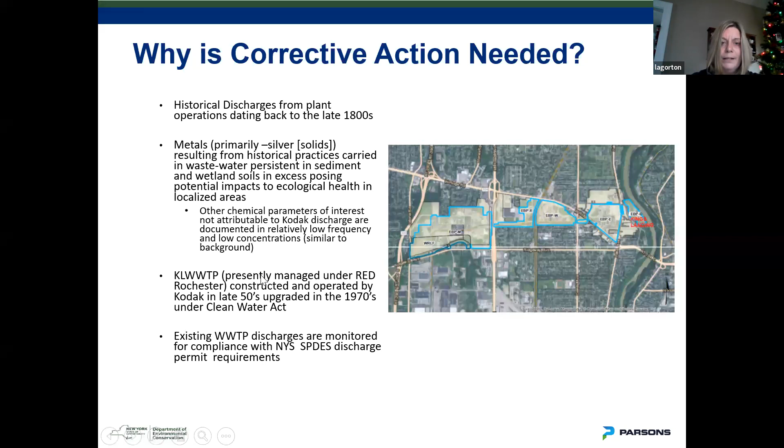During this process, we worked extensively with stakeholders, our primary stakeholders. We were under a memorandum of agreement with EPA, also working with our counterparts at DOH, with natural resource trustees, which members of the DEC and US Fish and Wildlife are members of. We're consulting on an iterative process through this time frame at key decision-making points to move the process forward.

Parsons did facilitate that process for us, and it all culminated in issuance of our prime dredging contract in early 2021, April timeframe. The selected contractor, White Lake Dock and Dredge out of Michigan, was selected to perform the work. They were the contractors on the water performing the work. They've done an excellent job for us.

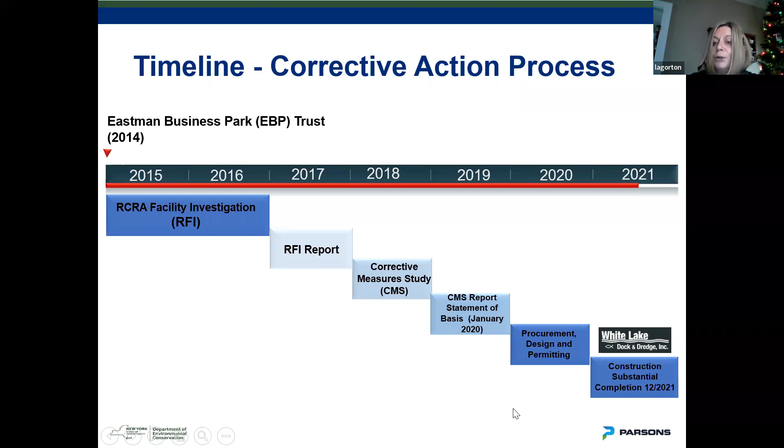And I'm happy to report that we did reach construction substantial completion here earlier in December. I'll note that Amy is going to go through some of the permitting stakeholders that were involved in the process, because that was a key integral part of getting us into the water, the permitting piece.

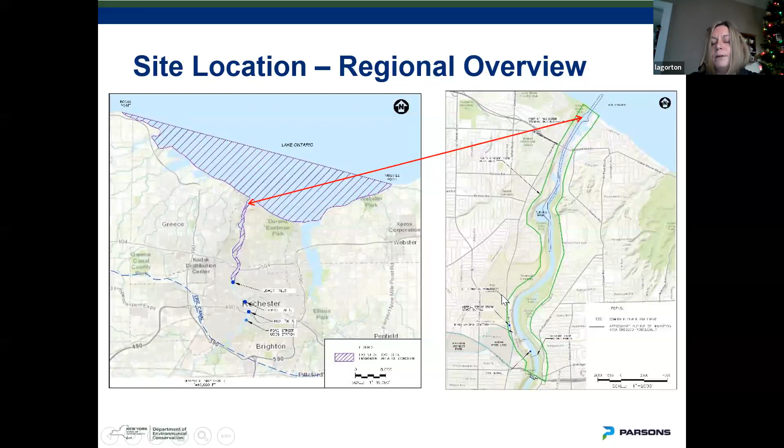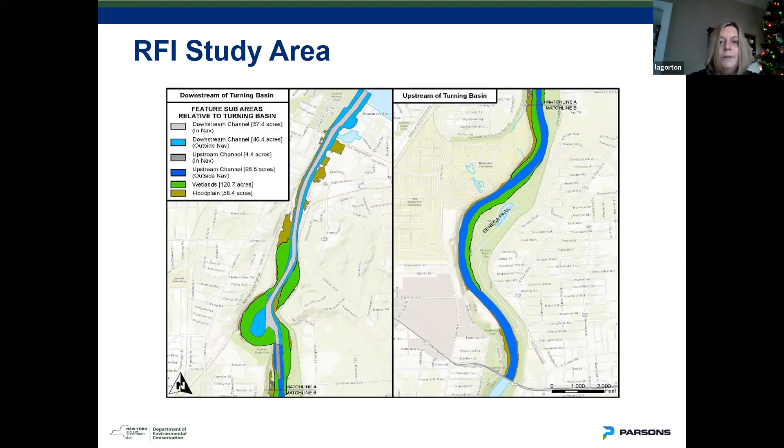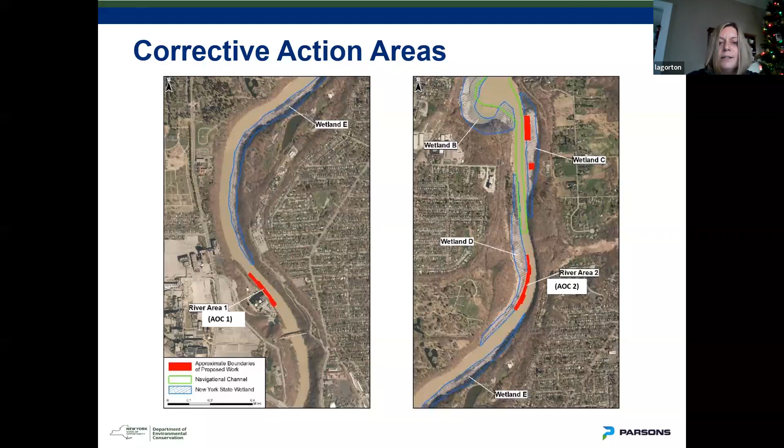And I'm going to advance into the next slide. These areas are the corrective action areas that were selected for remediation. Many have asked me along the way, how do you get from point A to point B and select these areas? Well, multiple lines of evidence and data were evaluated and applied through the process.

So the focus areas, we found silver to be the primary contaminant of concern. There were areas that might be subject to erosive forces under flooding or high flow conditions that may release those impacted sediments back into the environment. We also focused on the availability to the ecological receptors in the area. This is an example of some of the studies that were conducted, and this is just a snapshot, not all inclusive, but many, many studies went into this, and all the studies resulted in data that were used to develop multiple lines of evidence.

And the data really led us to these red areas where we felt we could add the best value, balancing criteria to address any future impacts, and again focusing these studies in the wetlands as well.

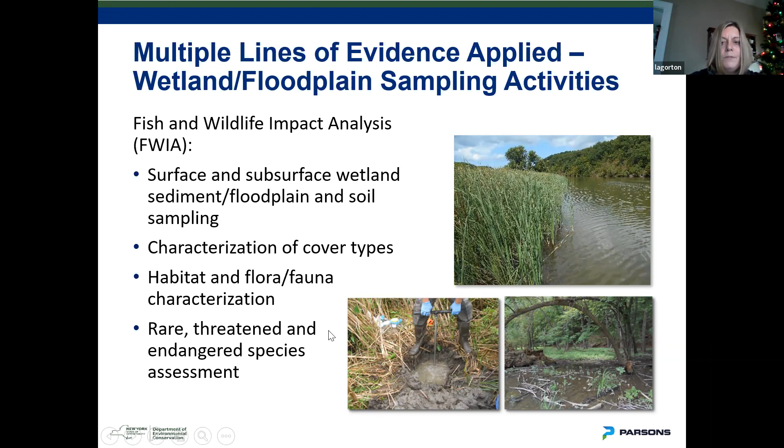Back into the environment resulting from contaminants of concern. Silver was selected as a primary contaminant of concern for both river and wetland sediment and soils, and it was focused on some primary scour zones—areas that might be subject to erosion and release of contaminant under high flow conditions.

Back to remedy selection, we worked closely with DOH and studied impacts to the silver. Silver was not identified as a contaminant of concern related to human health, under a passive recreation use standard. Resulting in that, our selection of the remedy really focused on ecological exposure.

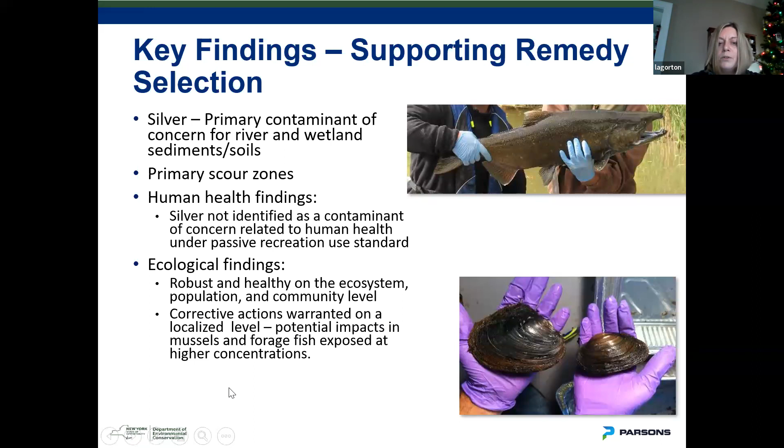As we transitioned into that phase of the project, we really saw that generally the river system is very robust and healthy. You can see by the pictures on the right, the fish and mussel community is robust. But the data also led us to support that some corrective actions were warranted on a localized level, where there were potential impacts to mussel and forage fish at particular locations that may have been exposed to higher concentrations of silver.

With that being said, these are the corrective action objectives that were developed for the program. I won't go through all of these bullet by bullet.

This led us to the considerations for development of the selected remedy, which overall was to reduce and stabilize areas with the potential for transport of silver-containing sediments. We evaluated action levels, sediment guidance values were screened, and we developed many river and wetland alternatives in the corrective measures study. They were developed separately and reviewed before the remedy was selected as part of the corrective measures action process.

The selected corrective action and construction elements implemented this past summer included dredging—20,000 cubic yards of riverbed removal, 8,000 cubic yards of wetland removal—and also some isolated capping in river channel areas and backfill in wetland areas. All the backfill placed met an ecological use standard, a Part 375 ecological use standard for those familiar with the regulations.

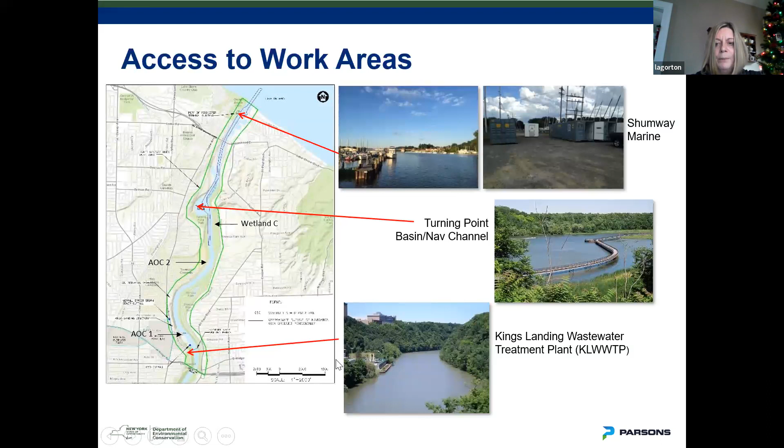Perfect, got it. As Lisa pointed out on the previous slide, there's 28,000 cubic yards of dredging. In addition to that, to restore the areas, there was about 28,000 cubic yards of capping and backfill material, an equal quantity. So a total of about 56,000 yards of material to move into and out of the river.

So the question became, where are we going to be able to do that? The river is flat at the mouth by Lake Ontario at the north end, but most of that area is marinas and parks, very limited open space to move that kind of material through there.

We had conducted most of the investigations on the river through the Shumway Marine up at the north end of the river, but that was small boats—typically pontoon boats. As you go south on the river, going upstream, the river becomes less and less accessible due to wetlands, and a gorge starts to become very deep, very incised. There's the walkway at Turning Point Basin, and then it gets very steep, very limited access, no roads down to that point.

There was one point at King's Landing. It's adjacent to one of the work areas, AOC 1, River Area 1, adjacent to King's Landing off of Maplewood Drive, that we decided to use.

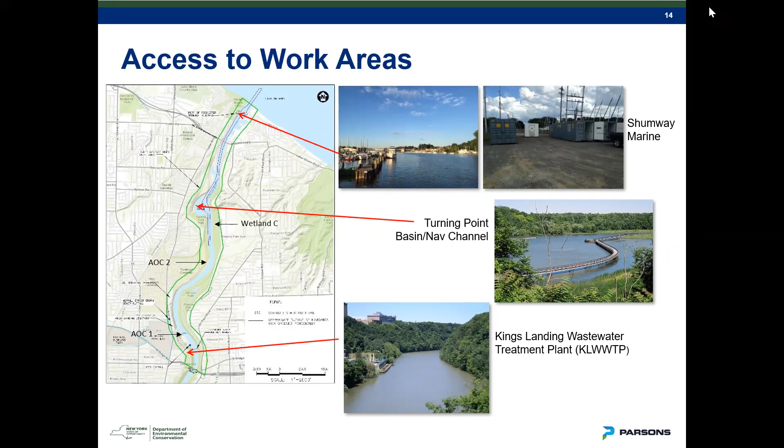We selected the staging area on the lower right corner of the figure. You can see where it's located, right by King's Landing, also adjacent to one of the river areas. But there are 3 work areas: river area 1, river area 2, and wetland C, and they're pretty good distance apart.

It's 1.5 miles from the staging area at King's Landing to river area 2, plus an additional half mile, so a full 2 miles distance between them.

The work areas are defined by different colors: green, orange, and purple. Wetland C on the left, which is purple, has 2 separate areas, one of which is disconnected from the river, not adjacent to it. So we had to go across the wetland to get to that area to do the work.

The work elements involved moving all the material back and forth on the river in barges, both the dredge and the cap material, taken to the staging area where it would be offloaded or loaded, processed, and eventually disposed of. Any water from the dredging, which could potentially be contaminated, would be treated and discharged to the King's Landing treatment plant, which was advantageous because we didn't have to haul it any distance—we could simply pump it to the adjacent treatment plant.

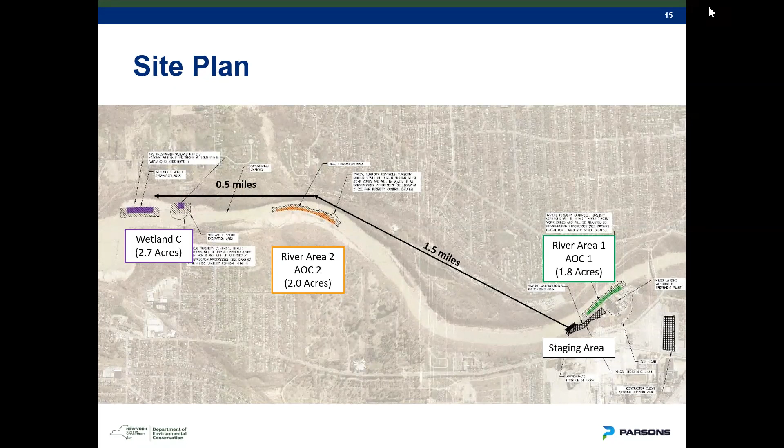So what did we have to build at King's Landing? It's off Maplewood Drive, in the gorge, dropping about 150 to 200 feet down a steep access road. We found there was about 2 acres usable—a long, skinny area, but fairly close to river level, only about 15 feet above the water elevation, so pretty good access. We didn't have to cut a lot of trees or do a lot of grading to make that happen.

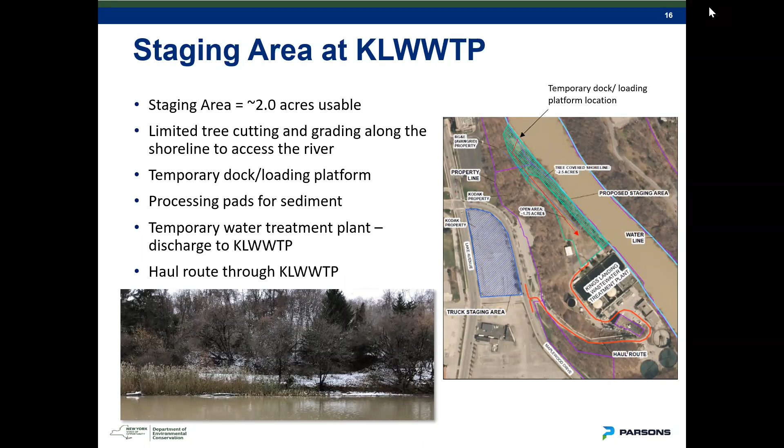We had to build a temporary dock and loading platform at the water's edge—you can see that at the top right corner of the picture. We also built processing pads for the sediment, since it would be too wet to truck off site, plus a temporary water treatment plant on site to handle whatever water came off the sediment, and a haul road to the plants. The red line shows the route from the dock down into the plant, then a windy road up to the top. It was a small area, but we anticipated it would be big enough to do the work.

These are actual photos of the area during construction, and we were pretty fortunate—a lot of these photos are actually drone photos. The contractor had a drone, which gave us some very advantageous shots.

The first photo, top left, is a temporary dock built out of sheet pile with stone and wooden mats to fill it in. The river bottom there is fairly steep, giving us quick access to deeper water for the barges. The photo in the lower left corner is the actual dock, just about completed—that's where the barges were loaded and offloaded.

Anything offloaded was taken into a truck and hauled up the haul road, the skinny line between the trees, to the processing pad.

The top right corner is the sediment processing pad. It's got 2 sections that would hold about 800 cubic yards each. It was lined with HDPE, a polyethylene liner, and some cement so it would retain any water that came off the sediment, so we could treat it and send it to the treatment plant.

The bottom right picture is the actual completed processing pad, that long skinny item. The blue area is the water treatment tanks, and there was a treatment pad built for the water treatment plant as well, which would also contain any water in case of leakage.

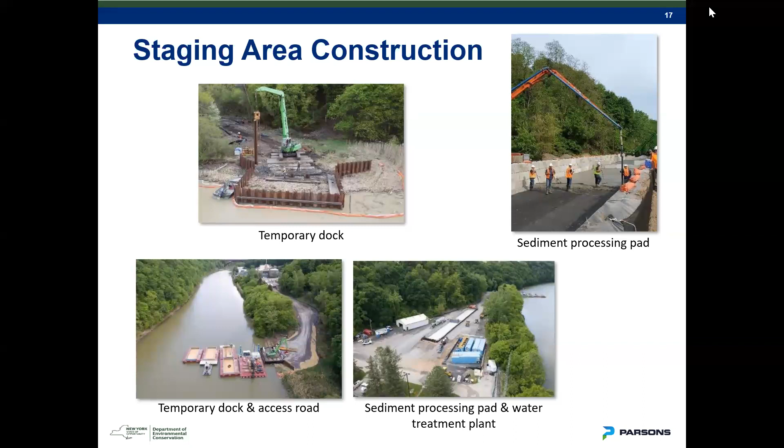All right, the dredging. We had 2 areas of in-water dredging. We anticipated 28 inches, and we allowed for 6 inches of over dredging, mainly because it's very hard to control underwater dredging to exact tolerances. And it was about 20,000 yards there.

Wetland C was 26 inches. We allowed for 6 inches of over dredging. That's because the surface of the wetland is very soft and it would not support heavy equipment very well. And in Wetland C, we actually had to excavate into some of the areas, particularly the area that was not at the river's edge.

I'll show in a couple of slides the Lake Ontario elevations and how that actually affected the work. And also in that area, to be able to dredge in, we were able to translate into some wetland enhancements.

for variable topography. We had some restrictions on when we could do the work due to fish spawning in both the fall and the spring. In the wetlands, we were allowed to work from June 1st to October 31st, about 5 months. In the river, from July 1st to October 31st, 4 months. But that's a little bit difficult because most of the material, about 70%, was coming out of the river with a 1 month shorter duration.

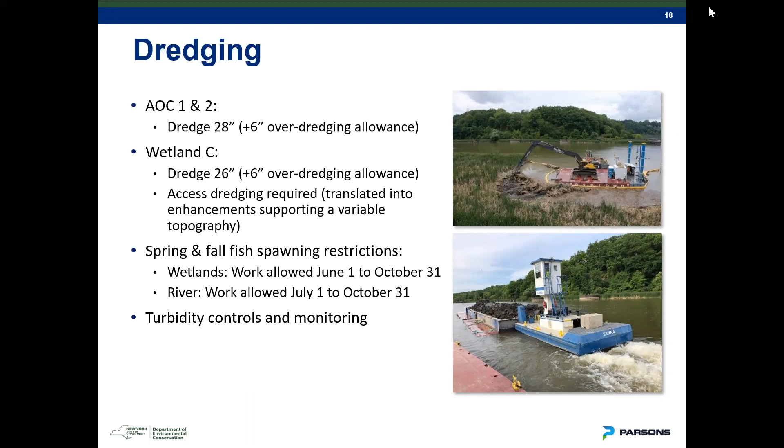Fortunately, we were able to have no restrictions on the dock construction, so we got that ready ahead of time. And we'd have to have turbidity controls and monitoring so we did not affect the river quality.

These are some shots of the actual dredging. You can see it's a barge mounted excavator. It had about a 70-foot reach, and it would only require about 22 inches of water to be able to work. The barges or scows where the materials were put into would carry about 80 yards each. They would draft about 10 inches empty, but about 5 foot when full. So you can see the importance of having water depth in order to do the work.

Those barges would be tied off to the excavator barge and then loaded up as they were taken care of. Most of the work areas were adjacent to shore. You can see there's some pretty neat excavation right along the edges of the wetland. And you can see, particularly in the bottom right corner, the turbidity controls, the silt curtains that went around the work area. That would be moved up with the equipment as it moved.

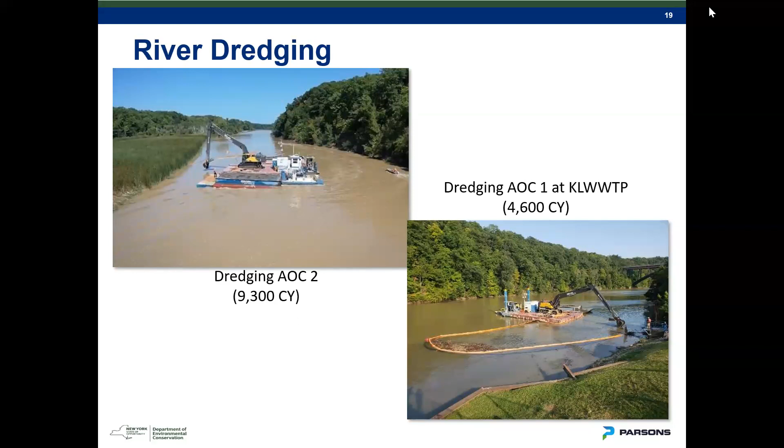We measured turbidity both upstream and downstream to make sure there were no increases in turbidity of the river. But you can see in the top left corner, the color of the river. It's pretty chocolate, so the turbidity is pretty dark. It's just normally from the flows in the river.

Lake Ontario water elevations. This became important. Lake Ontario is obviously controlled by Massena up at the St. Lawrence River, to some extent, but Mother Nature controls most of it though. And there's little difference between the actual lake and the river work areas that we were in.

In 2017 and 2019, there was some flooding. You can see the peak flows up around elevation 249 or so. Typically the summer peak is about 247 foot. Wetland C lies at about 246. This year, the actual elevation during the work was 245.4, so quite a bit lower.

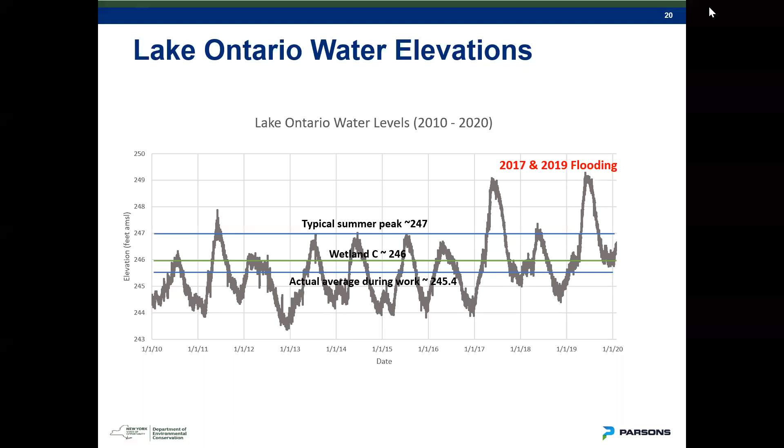The barges wouldn't be able to float into Wetland C because of that elevation. So that's why we had to dredge some additional areas into it. And I would note that the river areas were not affected by any of the water depth.

The NRD trustees had requested that topography for the wetland enhancements, and then they requested that we leave those slots deeper, so the final elevation would be less. This gave us different water depths and different types of vegetation growing in there. I'll show more on that in a later slide.

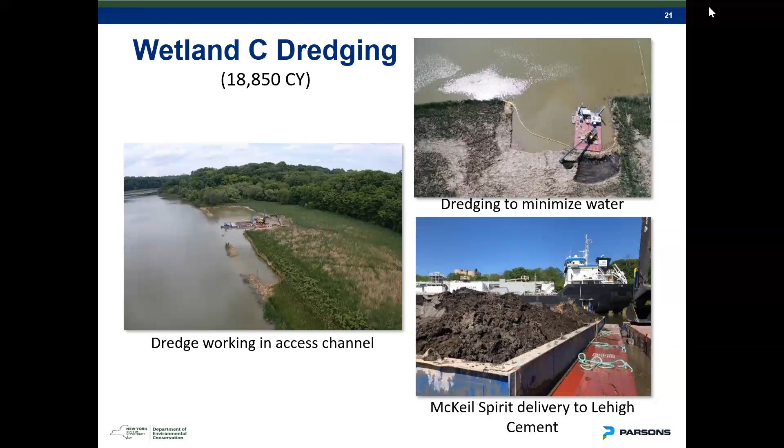And once they were able to no longer reach any further, they would take that dam out, let it flood, and then move ahead. Interestingly, in the bottom right corner, you can see how close we were working to the McKeil Spirit that delivers cement to Lehigh. That's about a 459-foot boat that comes in there and backs out. So pretty tight quarters.

Once the sediment was excavated and loaded into barges, it had to be dewatered and solidified with Portland cement, since obviously it was too wet to be able to truck off site. The material was taken to Seneca Meadows in Waterloo as non-hazardous, and then the water was treated and taken to King's Landing under an agreement with Kodak.

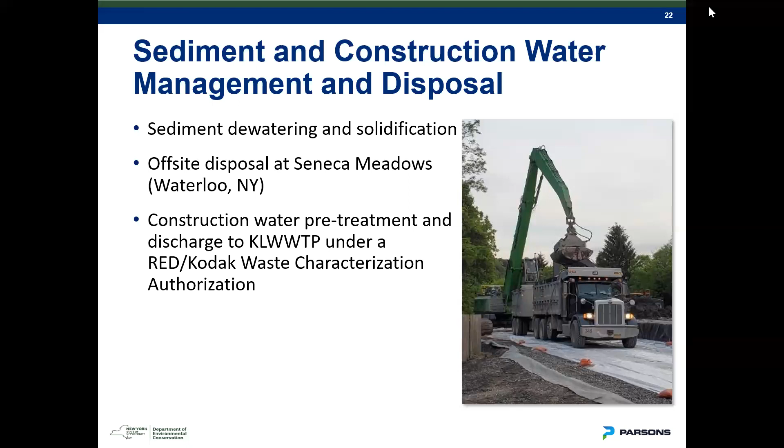This is a picture of a truck being loaded. You can see there's plastic underneath the wheels. The contractor used that to contain spills and keep the road and tires clean. If there was any spillage, they would clean that up and replace the plastic as needed to keep things clean.

We used 2,550 tons of cement, about 6% by weight. 46,000 tons, 1,300 truckloads that had to run through the site, and discharged 272,000 gallons of water to the treatment plant.

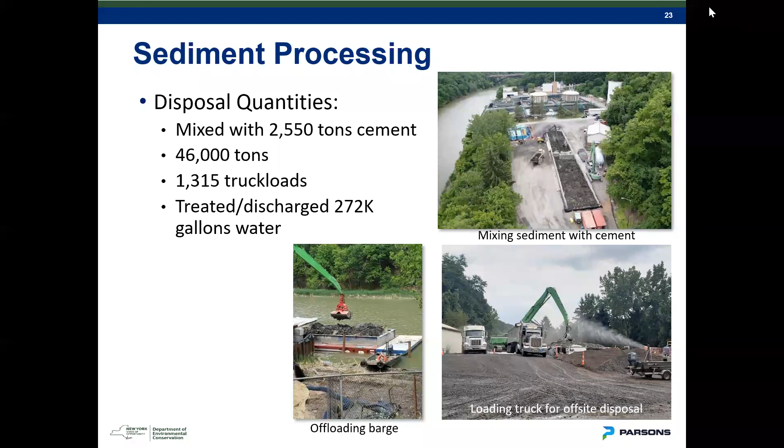Once we were done, those areas had to be capped or backfilled and restored - AOC 1 and 2, the river areas. We had some capping in front of King's Landing, a multi-layer cap made of sand and stone. Wetland C had sand and topsoil in the areas that were not going to be an access channel, that would return to the original excavation depth. Backfill was sand in just the channels, and then restored with a variety of wetland seeds and plants.

The backfill material was obtained from relatively local quarries - Sodus, Webster, and Phelps. And then we had to restore the staging area once all of this was done back to the pre-existing conditions. During the capping and backfilling process, we also had those spring and fall fish spawning restrictions as we did with dredging, and the same turbidity controls.

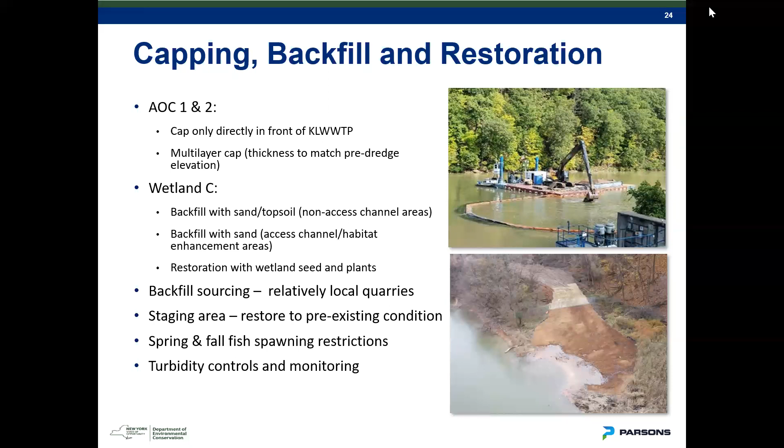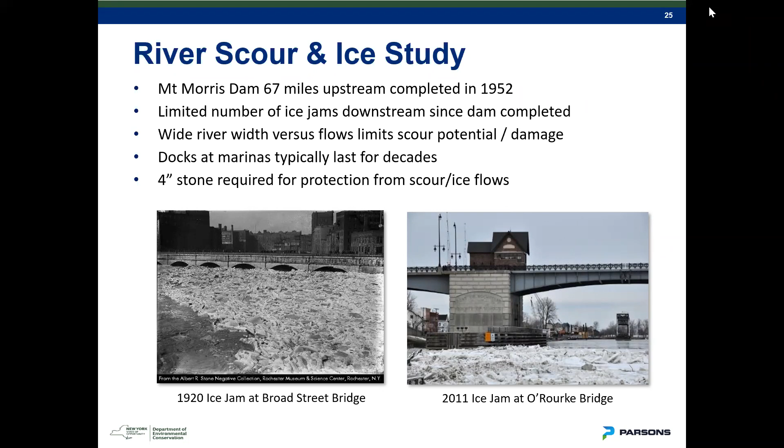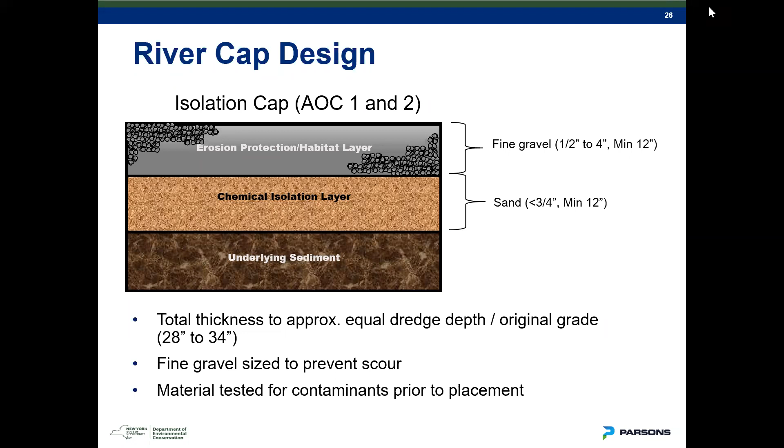This is a quick schematic of what the in-river cap design actually looked like. We had 2 layers: a chemical isolation layer on bottom, made of sand, 3/4 inch or smaller, 12 inches thick minimum, and then an erosion protection habitat layer, which is the 4-inch stone to prevent scour on top of it. It was approximately the same thickness as the dredging, 28 inches, plus that 6 inches of over-dredge, so somewhere in the range of 28 to 34 inches. All those materials that were put in there were tested for contaminants against the ecological standards, as Lisa mentioned earlier.

Wetland C was similar, 2 layers, sand and topsoil, again 12 inches thick for each layer, sand on the bottom, topsoil on top. Topsoil was only required in the areas that were going to be above grade, returned to the original elevation, and the areas that were the channels were just sand. Again, the thicknesses were comparable, we tested the material for contaminants, and based on the Lake Ontario elevations, the low water level is required for dredging into that area in order to do the work.

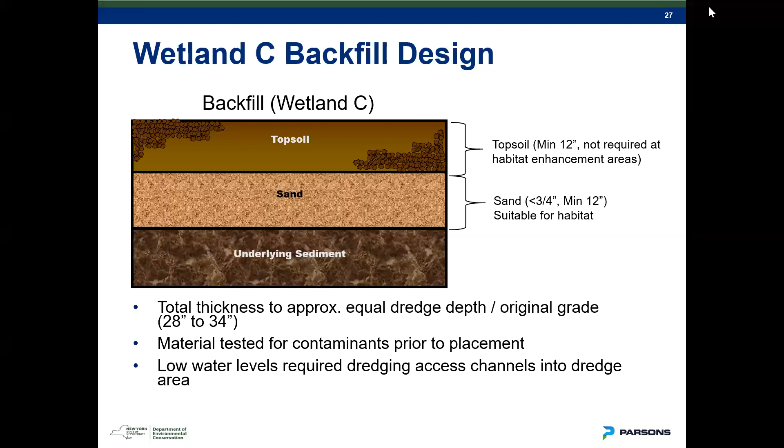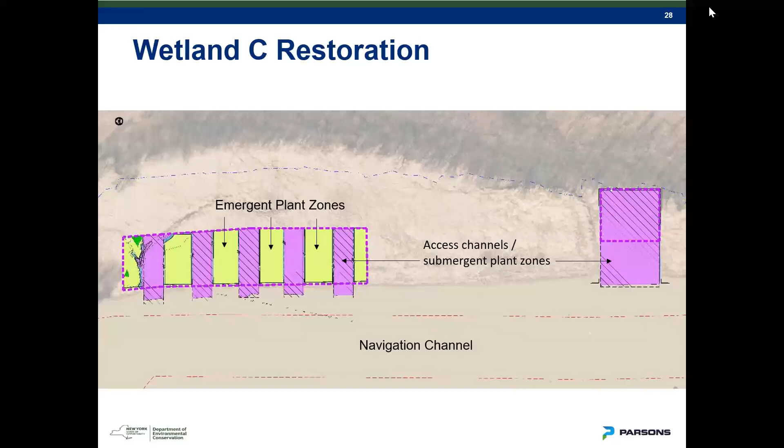Backfill and capping is basically the opposite of dredging, minus the processing, materials, offsite disposal and water treatment. So basically we just had to deliver and load the material into barges and then go place it in the river.

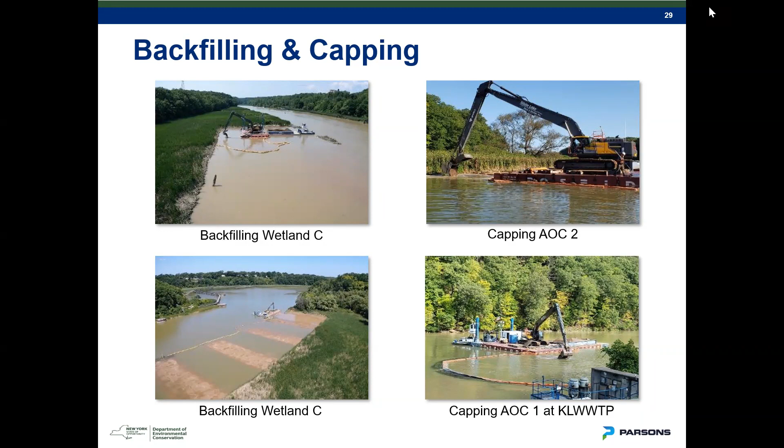Left-hand side shows backfilling occurring in Wetland C. The first slide top left is where it's starting, bottom left is close to completion. You can see the various elevations, so we have some different topography. Area AOC 2, top right corner, is immediately adjacent to a wetland, and bottom right is right in front of King's Landing, with a real good view from shore on that one.

So working blind, how do you control all this work if it's underwater and you can't see what you're doing? Well, the dredge operator has a dredge program. It's a GPS that gives him both vertical and horizontal control.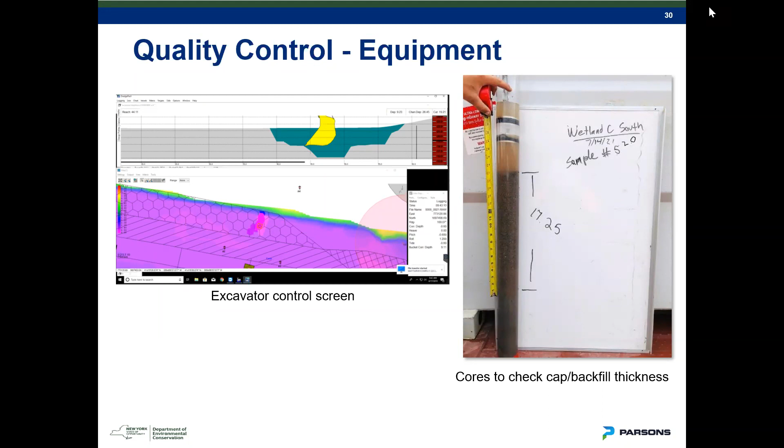We could check the sand layer with Lexan tubes, in addition to any checks we have from survey. You can see them measuring, and the difference in materials is about 17 inches at that particular location in Wetland C.

Quality control for surveying: we had 3 types of surveying methods being used. There was the survey boat using sonar, also an echo boat for shallow water, which was a remote control boat basically working with a joystick that would record readings. Once you get into real shallow water where neither boat can access, the guys actually did pole shots. It's kind of a humorous picture on the right - the guys came up with a pretty inventive footwear method, with paint trays strapped to his feet so he wouldn't sink into the material.

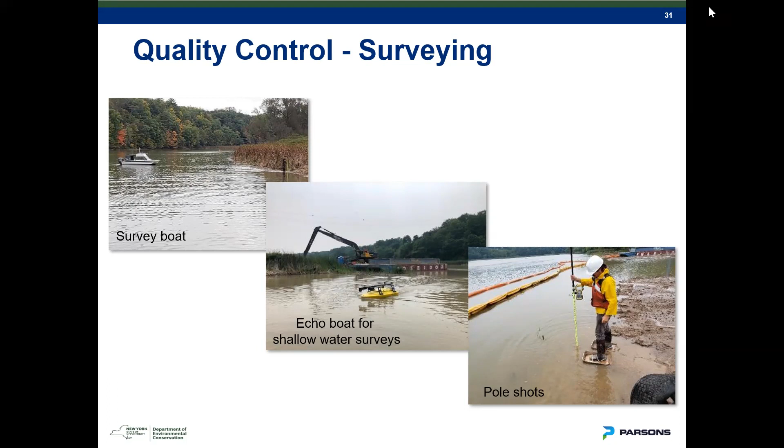Quality control for turbidity: the work areas were surrounded by silt curtains, a floating curtain with a weight on the bottom so the top stays at the surface and the bottom goes deep into the water column to surround and contain the area. You can see on the top right we're working inside the curtain in all areas - that's a picture during capping.

We had monitoring buoys to measure turbidity, located 100 foot upstream and downstream. They used telemetry to send messages back to the work trailer, and we could compare the upstream to downstream readings to make sure there were no exceedances. Fortunately, through the work, we did not have any exceedances.

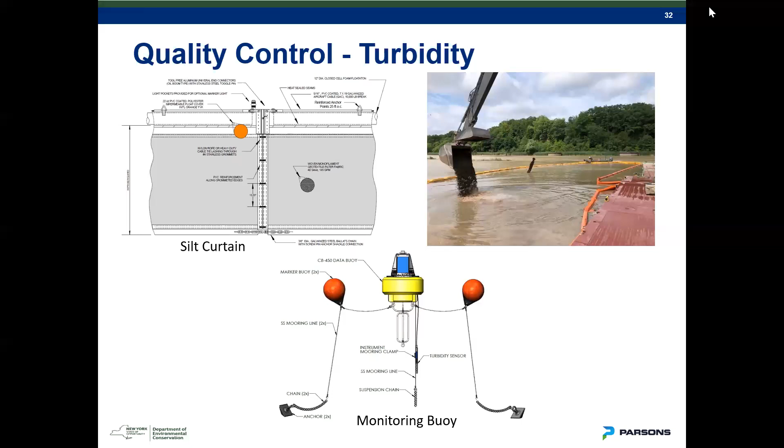Wetland C plantings: we had both emergent and submergent plants. Emergent plants grow above elevation, and submergent ones below. You can see on the bottom right photo the differences in the submergent and emergent zones - those are in the process of revegetating.

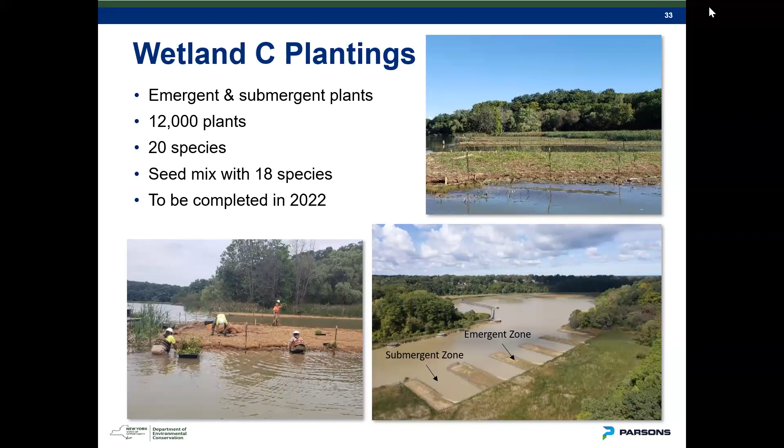We actually are planting about 12,000 plants made up of 20 species, additionally using a seed mix with about 18 different wetland species. The work will be completed in 2022. Unfortunately, some of the seed mixes and plants were not available in 2021 - surprisingly, a pretty big demand for it. But you can see we got a pretty good start on it in the areas, and it'll only get better next year when the growing season comes along.

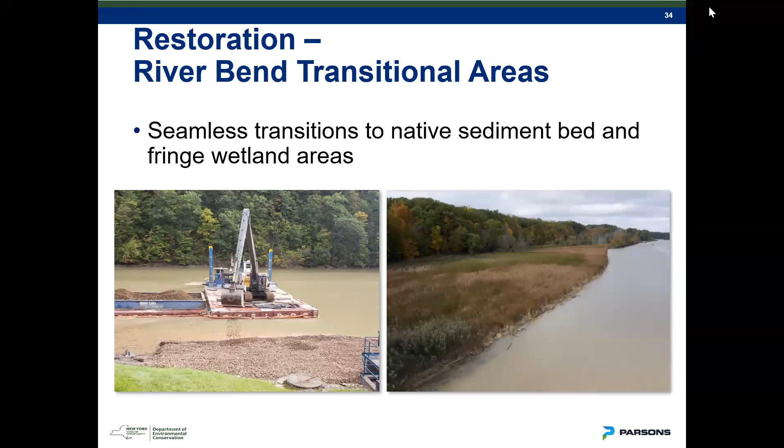Restoration of the river bend areas - a couple of quick pictures here. Basically, you wouldn't even notice it. Bottom right picture is river area 2, where you see a slight disturbance at the river edge - you wouldn't even know we were there for the most part. Bottom left is right next to King's Landing, and you can see some of the stone is exposed. That'll vary depending upon the water elevation at the time, but it provides some good scour protection out in front of King's Landing.

My last slide is the staging area restoration. All those temporary facilities have been removed - the dock, the access road regraded, recreated a paving area if that was there to begin with. We've got topsoil and some seeding done and some erosion controls. We've got some work to do in 2022 to finish things up and clean it up. Obviously we got done in late November, December, not the best time of year to see grass grow, so we've got erosion controls set up with silt fence, socks, and hay bales, and that'll remain until the grass is established sometime late next year.

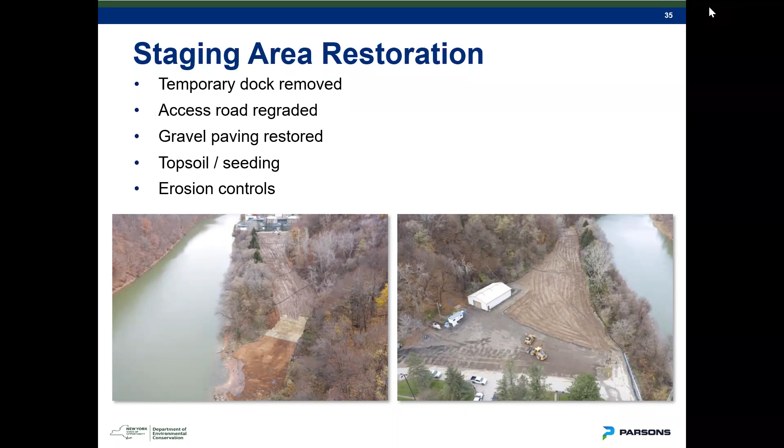Before we could do any of this work, we needed to permit this work. And permitting is always more complicated than most people think. So to start, you ask yourself: where is the work going to occur? What does the work require? Is this a regulated activity? And who's going to be involved?

So the first question, where is the work going to occur? Well, here we're going to be in the lower Genesee River, in the coastal zone of Lake Ontario, in wetlands, and in floodplains. All of those things are relevant to who's going to get involved in this project from a permitting perspective.

Now, what does the work require? Well, it's dredging, filling, tree removal, ground disturbance, among other things. And then is the activity regulated? Applying that to where the work is going to occur kind of answers some of those questions, and also brings into focus what agencies will end up regulating these activities.

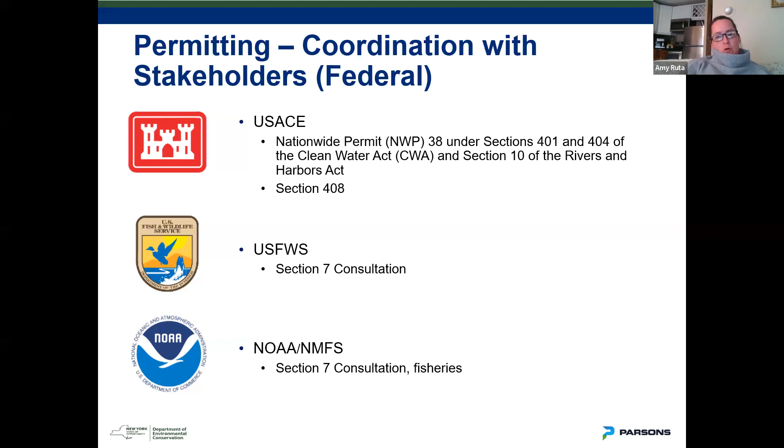So that's on the federal level. In the next slide, moving to the state level, we had several stakeholders involved as well.

We ultimately later did a permit modification. So we were issued a Section 401, and then later that permit modification was completed to accommodate NRD trustee coordinated enhancements in Wetland C that Bill had spoken about earlier. That was strictly wetland enhancements, and those enhancements were not part of our original permit application, so we later had to apply for a change regarding that.

For the New York State Department of State, we were within the realm of a coastal consistency review. To provide context, a coastal consistency review ensures the protection of natural assets in New York State coastal areas and also in designated inland waterways, and that must be done in compliance with the Federal Coastal Zone Management Act. It's a federal requirement that New York State, within the Department of State, completes.

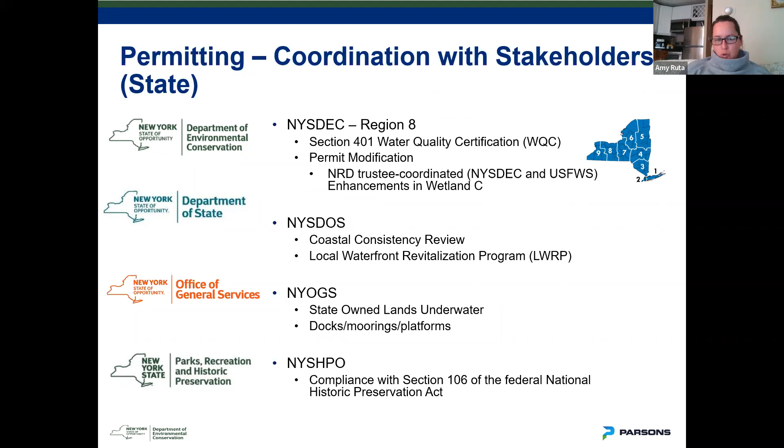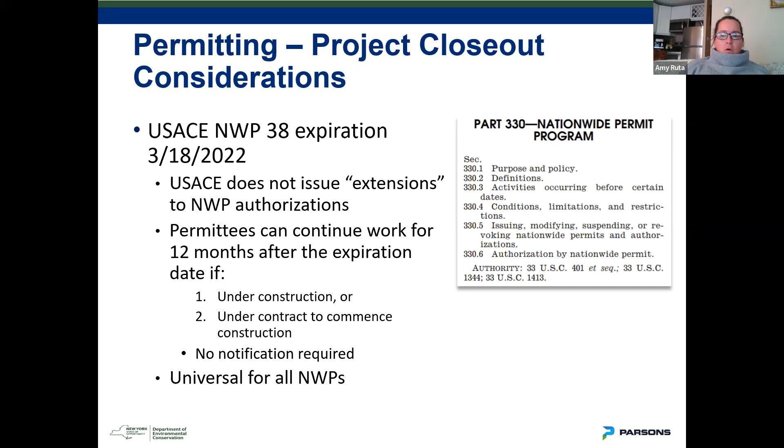This isn't special to us, this is universal for all expiring nationwide permits, unless your original authorization specifically tells you that you can't do this. Of those 58 nationwide permits, a good chunk are expiring in March, and they will be reissued by the Corps. So again, this isn't specific to our project, but it's an interesting side note. That's the permitting aspect of the project.